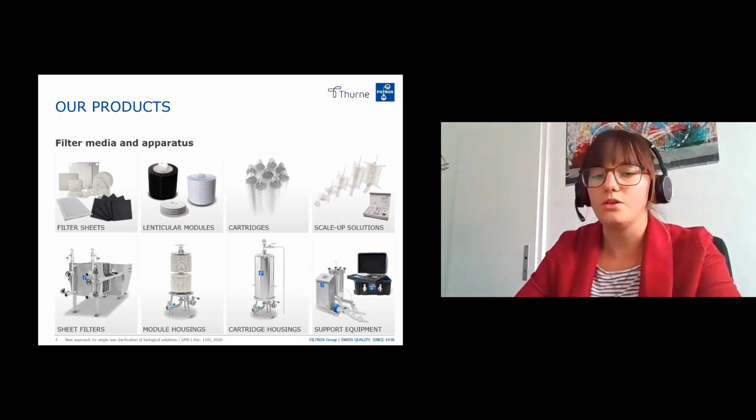We also have all-around assistance. So we do some trainings and seminars, testing services, validation support, and application consulting.

First of all, what are the trends in biomanufacturing? Often the goal is to reduce one production step, and when you achieve this, sometimes it results in cost reduction. Due to the biological process, we need a robust and flexible technology, fast and reliable, easily scalable and duplicatable process, and last but not least, particles or impurities must be removed.

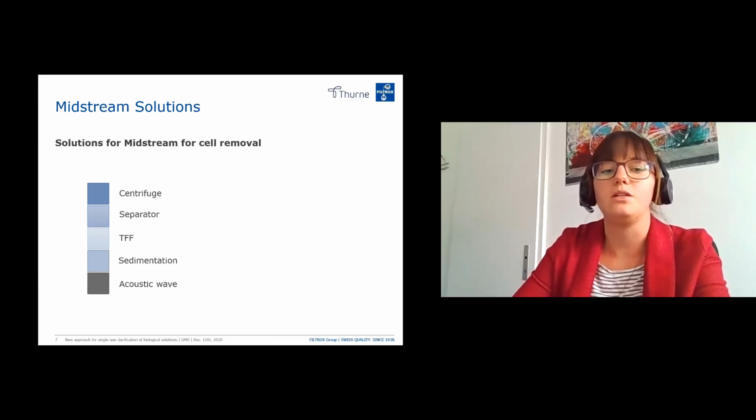Solutions for the midstream process. As you may know, you can apply a centrifuge step, a separator step, tangential flow filtration, sedimentation, or acoustic wave. All of these five process steps are nice, but they have one main disadvantage: they don't have a zeta potential.

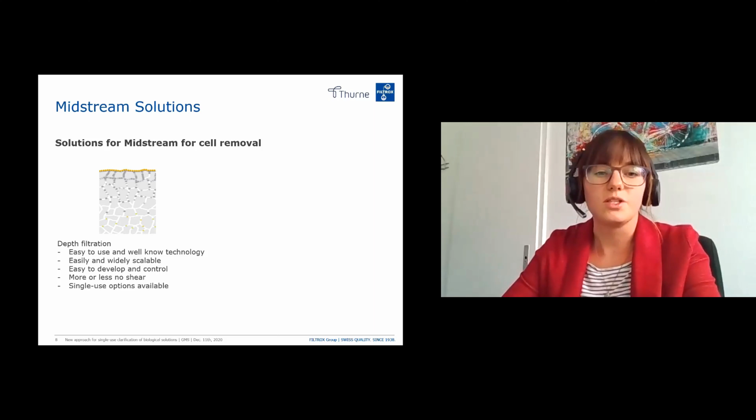So what do we offer as a solution for a midstream process? We offer depth filtration sheets. The advantages are they are easy to use. It is a well-known technology, easily and widely scalable, easy to develop and control, with more or less no shear stress. Single-use options are available, but the capacity is not high enough. Therefore, we recommend alluvial filtration, which has the same advantages as depth filtration, but with higher capacity.

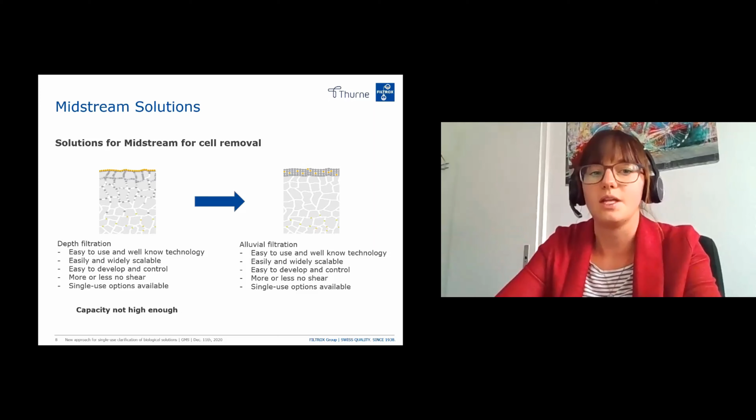Once again, I talk about the midstream process. We like to call it midstream because sometimes it's part of upstream, sometimes part of downstream. Here we have a centrifuge step and a depth filtration step, and with our single-use BioSD system, you can reduce one step, the centrifuge step, and do both in one.

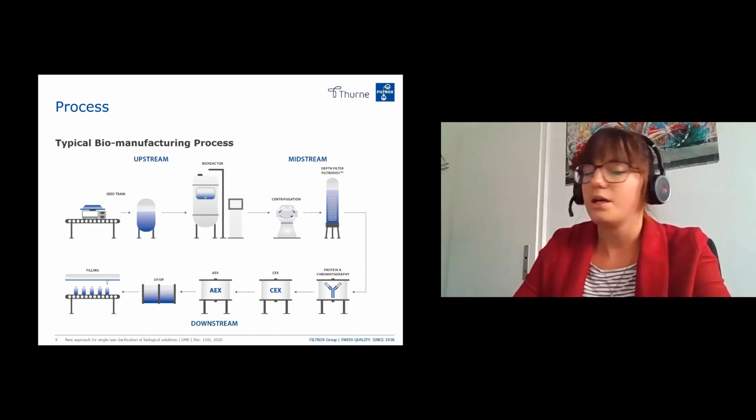Now I want to say something about the functional principle of filtration itself. First, surface filtration: particles are retained on the surface, and everything smaller than a certain retention rate goes through the filter. The depth filter sheet is much thicker, so particles are retained also at the surface, but also within the filter sheet by size exclusion. The yellow squares at the bottom indicate some particles which are retained by adsorption capacities or effects.

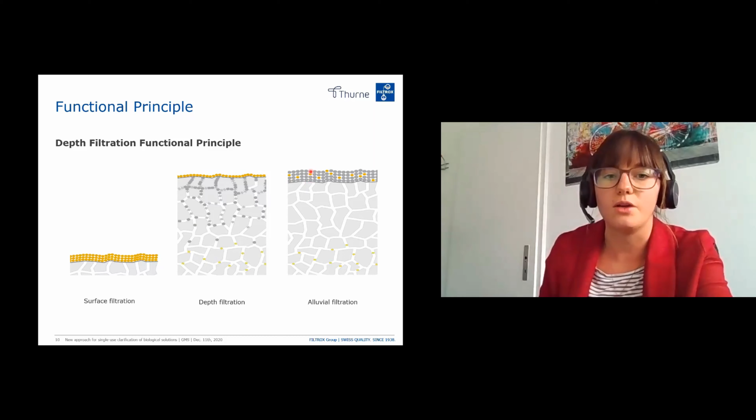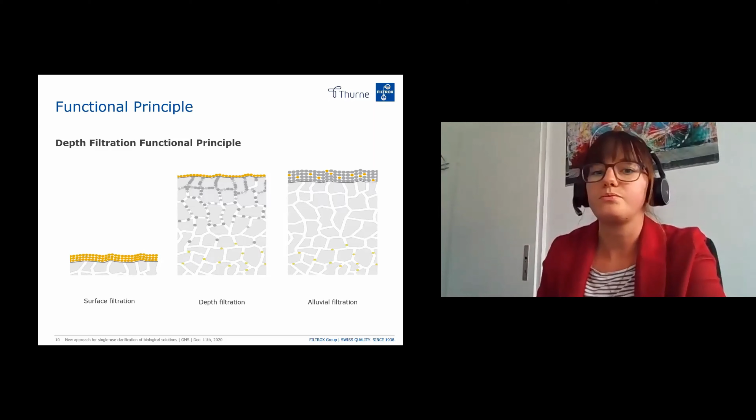And the alluvial filtration, here we add some filter aid to the unfiltered liquid, indicated by the gray dots. So particles, like the cells or cell fragments, will be retained within the filter cake, and the filter sheet or surface is constantly renewed. So the capacity is much higher. We also have some particles which will be retained within the filter sheet, of course.

What does alluvial filtration mean? As I said, you have a much higher capacity, also for a high particle load, especially when you work with high cell densities. It is an established technology, already used in plasma fractionation, and we have long-term experience in beer filtration. So far, it was not available as a single-use solution.

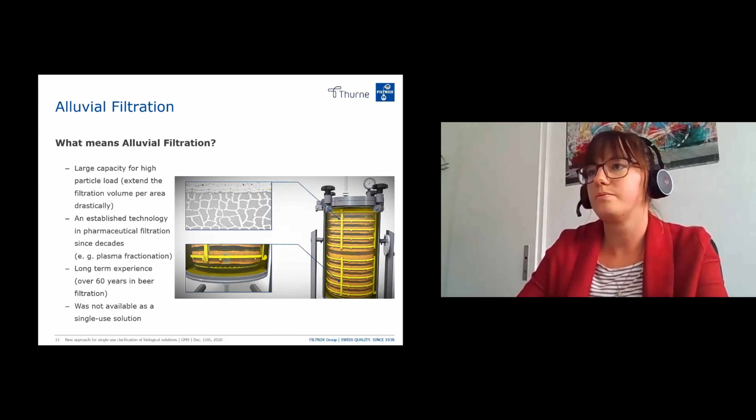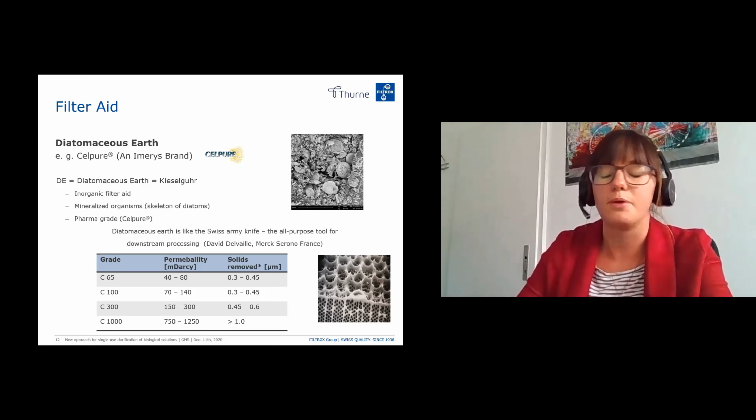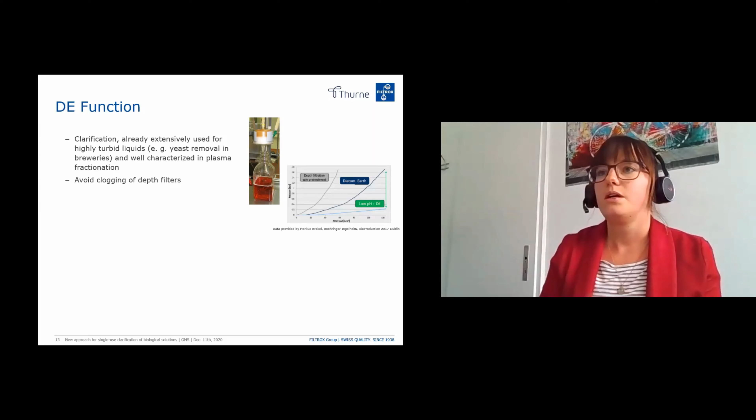The function of the DE also helps to clarify your liquid, not only the sheet itself. That's why it is very important to use the right DE, so you have to check at lab scale which DE grade or type will be best for your process. It avoids clogging of depth filter sheets, and it can remove other impurities like HCP, DNA, etc. It can do all of this at the same time.

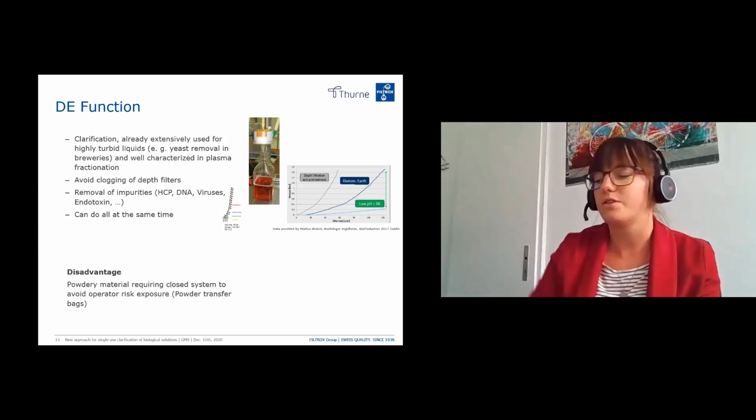There is one disadvantage, you may know. The powdery material has to get into the bioreactor, which is not very healthy, and that's why you need a powder transfer bag.

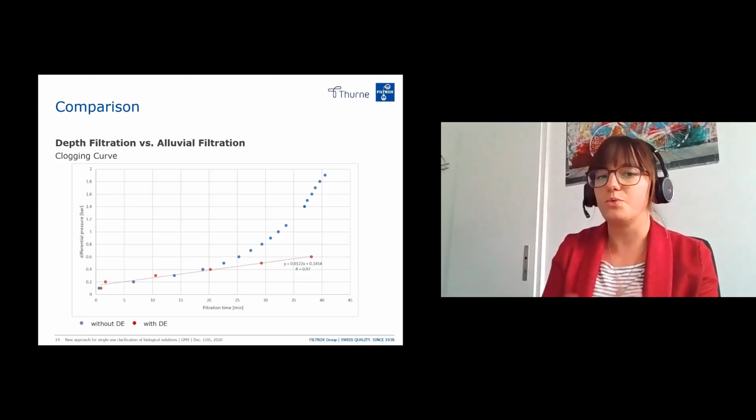In this graph, you can see very nicely the difference between a filtration with DE and one without DE. The blue dots indicate a filtration without DE, and as you can see, the pressure goes up very fast and exponentially. The same filtration with DE, the pressure goes up as well, of course, but linearly, and you can filter much more.

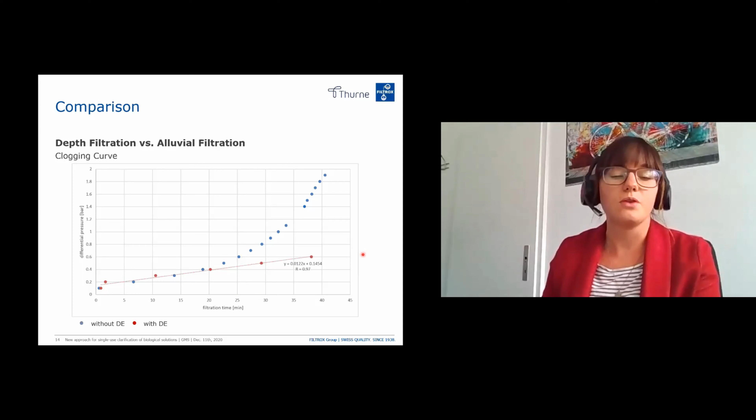This is a process comparison.

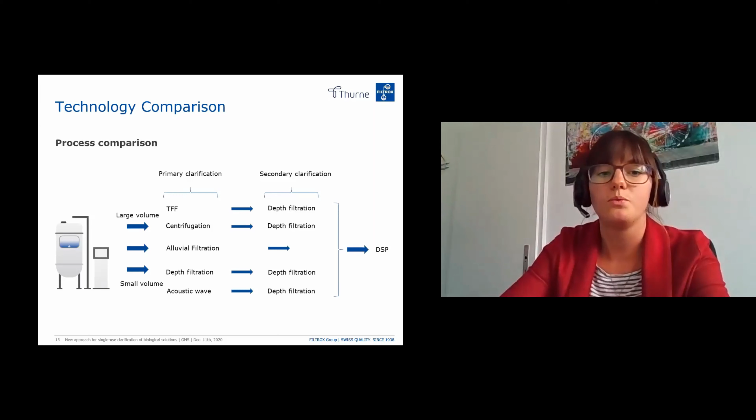If you have a large volume, you can add a tangential flow filtration as a primary clarification. After that, you can apply a depth filtration, or do a centrifugation step at the beginning and then a depth filtration before going further to other downstream process steps. For small volumes, you can add two depth filtration steps, or acoustic wave and depth filtration. With our BioSD system, you can do both primary and secondary clarification in one, with the alluvial filtration.

Now I come to our range, and I will start with a small scale, the 2-inch capsule. It is mainly used for proof of technology and for the evaluation of the DE grade and also of the filter sheet. I'll show you a capsule in real life. This is how it looks. You have a vent here, so it's very important that the air completely goes out of the capsule before you start the filtration.

After the 2-inch capsule, we have the next bigger one, which is the 5-inch capsule. I have it here as well. It looks similar, a little bit bigger, and it also has the air vent. I can show you them later when the presentation is finished, on the bigger screen. The 5-inch capsule is mainly used for evaluation of the 2-inch results and also for small pilot scale.

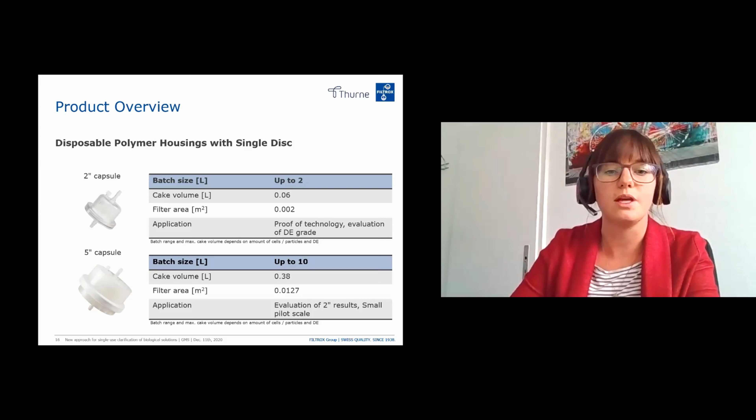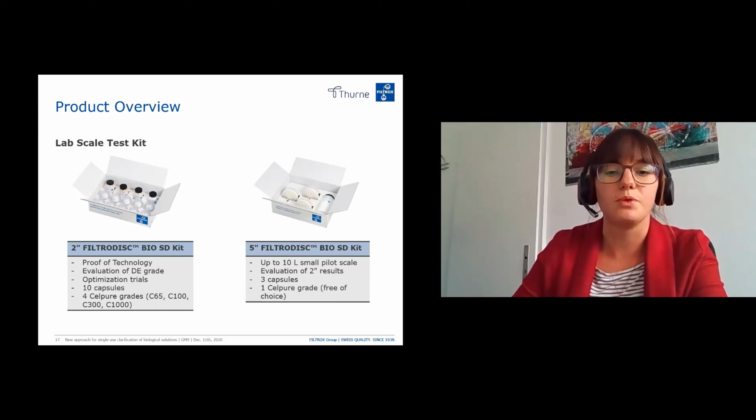Both the 2-inch and the 5-inch are available as a test kit. As I said, for proof of technology, the 2-inch is for evaluation of DE grade and amount, and optimization of trials, and it consists of 10 capsules with all 4 DE grades. The 5-inch test kit consists of 3 capsules and 1 Celpure grade, which is free of choice.

This is the setup in the laboratory scale that we recommend. You have the unfiltered liquid with the filter aid, and of course you have to mix it. Then a pump - we recommend a peristaltic pump - a pressure gauge, and a capsule with the vent. Then you have to collect the filtrate on a scale or with a measuring cylinder.

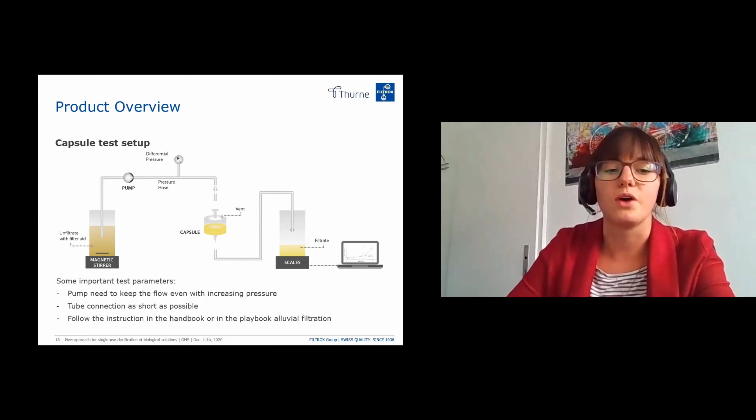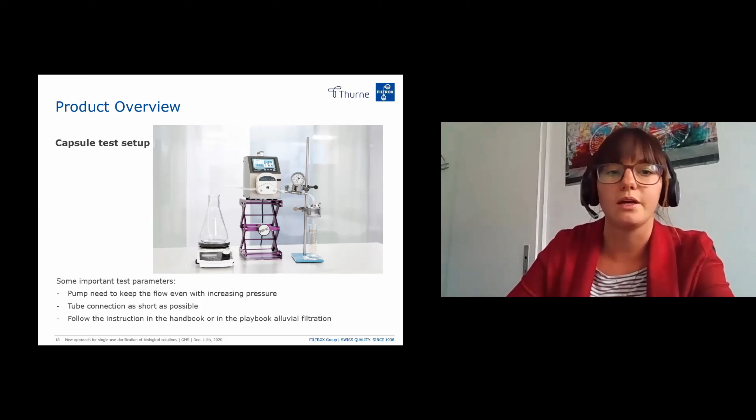Here it is very important that the pump keeps the flux even with increasing pressure. The pressure can go up to 2.5 bar, and the pump should go to 2.5 bar. Furthermore, the tube connection should be as short as possible, and I will show you that with this picture. This is how an ideal setup could look like.

The goal of a lab trial is always the same: the evaluation of the right DE grade in order to reduce the turbidity. Here you can play a little bit with the DE grade and also the filter sheet, and the optimization of the DE dosage so that you get a high efficiency. So the goal is to reach this green line - the optimization of pressure and time.

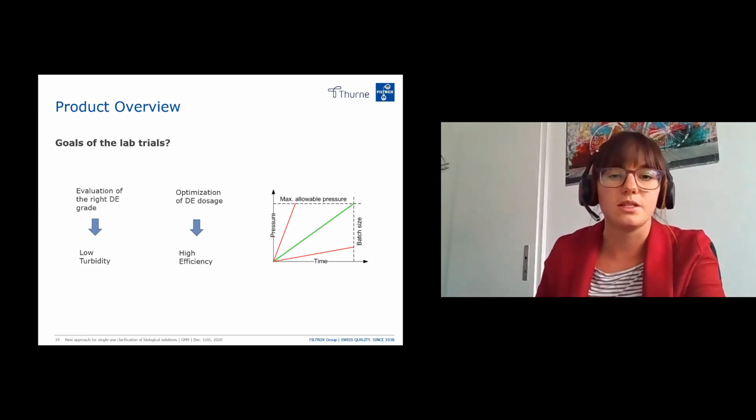Next to the 5-inch capsule, the next one will be the 10-inch capsule. This is the last capsule we have, which is not a standalone product. It just needs this filter holder. It is also used for small pilot scale.

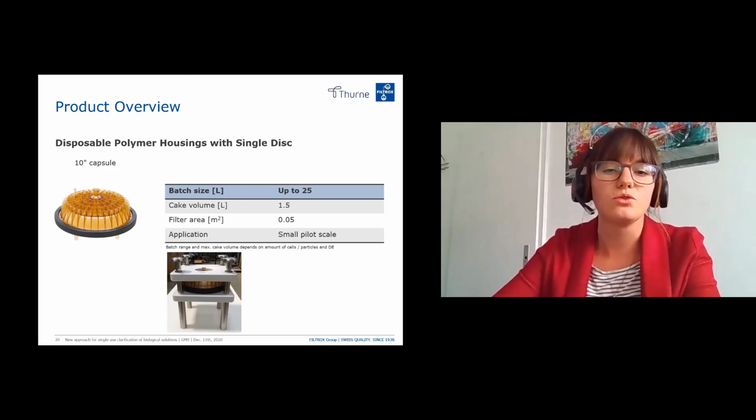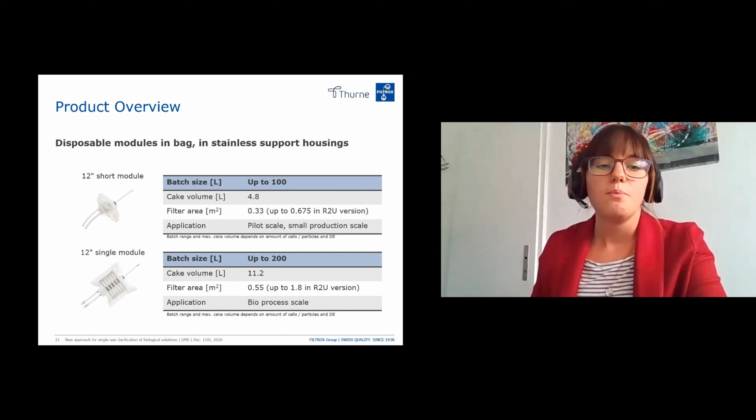Now I want to move forward with the bags. They need a stainless support housing - for example, the 12-inch short module, also for pilot scale and small production scale, and the 12-inch single module. Both of these are 12-inch, but this one has much less amount of lenses than this one, and both are available as a ready-to-use version.

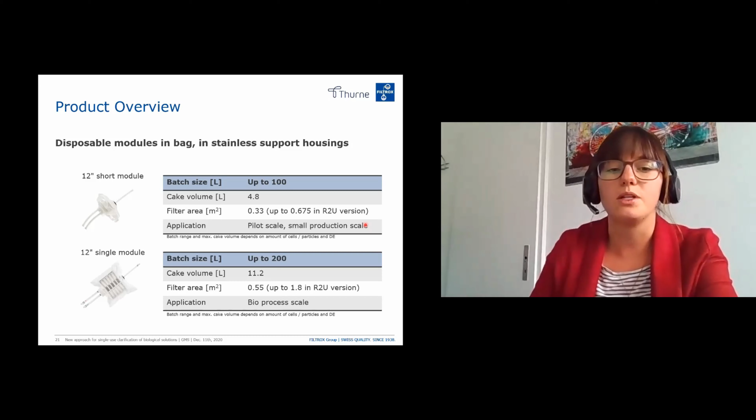Sorry, that means that the lenses are increased, so you have a higher number of lenses in a ready-to-use module, because the ready-to-use modules are mainly used for sheet filtration and not alluvial filtration. So for example, when you have a sterile filtration step with depth filter sheets in your pharmaceutical production process, you don't want to get in touch with your product.

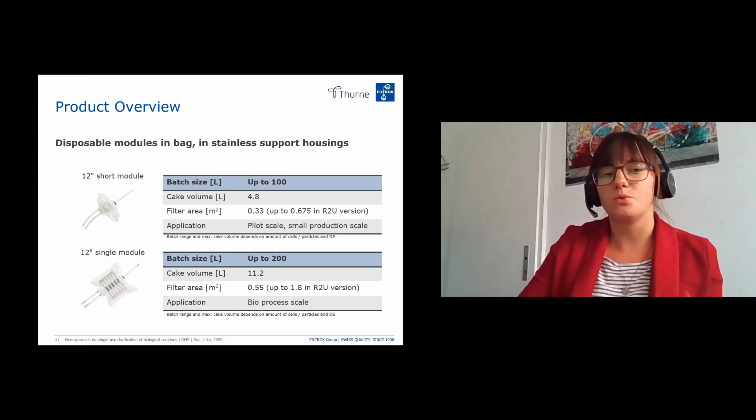I have this module here as well. This is how it looks like. I can show it later as well if you wish.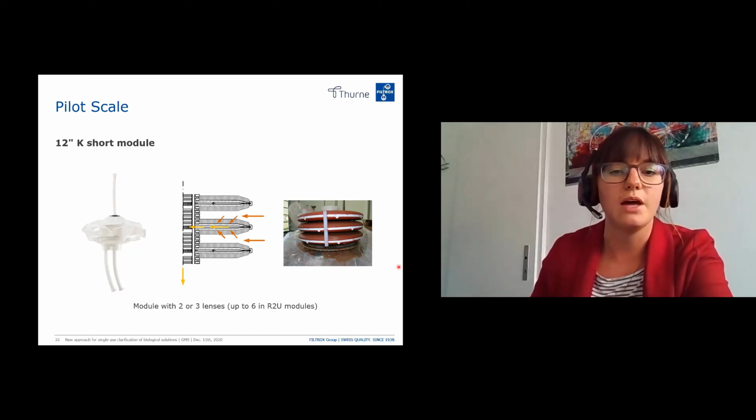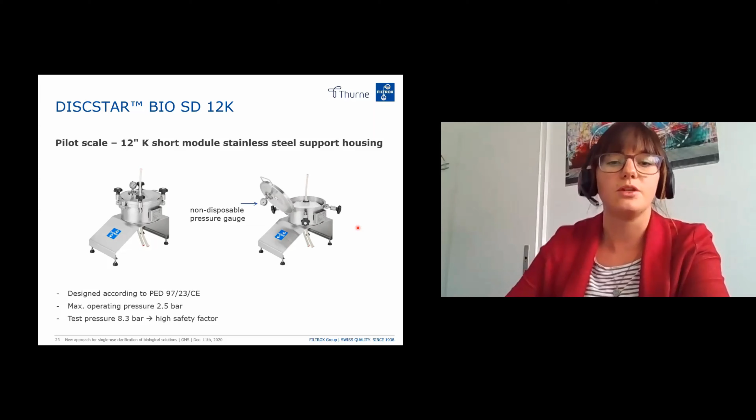And this is the support housing you need for this small volume module. As you can see, it is a very small housing, so you can have it on your table, on your laboratory's table.

This housing is for the 12-inch normal single module. All housings look the same, just a little bit different - some are a little bit longer than others. But all of them you can turn 90 degrees in order to remove the modules easily, especially when they are filled with filter cake - they are quite heavy.

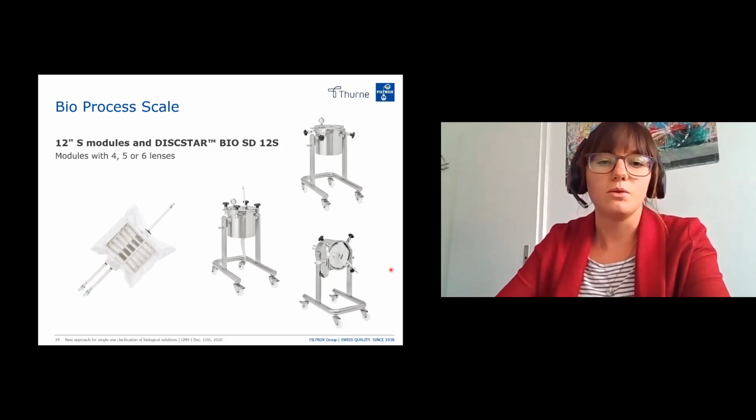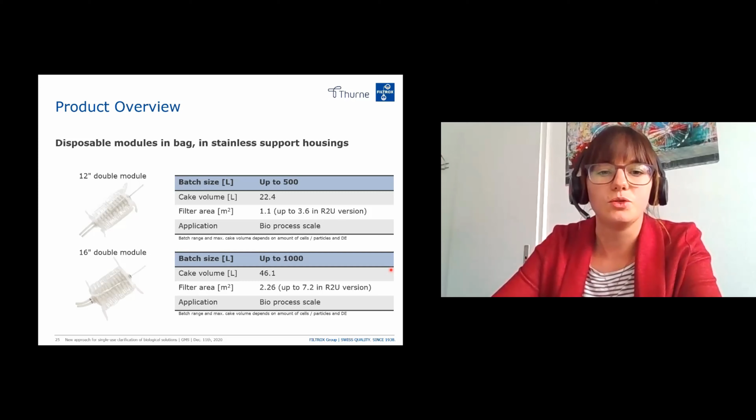So the 12-inch double module and 16-inch double module are the last ones in this series. The biggest one is the 16-inch double module, for the production process. And this is how it looks like in real life. As you can see on both pictures, the filter cake is built up on each lens in the same way and looks really good.

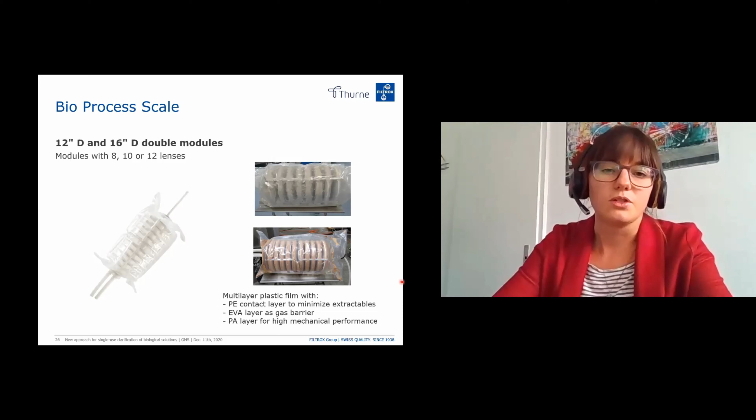It still has some space in it, so maybe in this example we could be able to filter a little bit more because the capacity is not reached yet.

And this is the housing. As I said, you can turn it 90 degrees to remove the module. And here we also have a trolley available, so that it is easy to discharge.

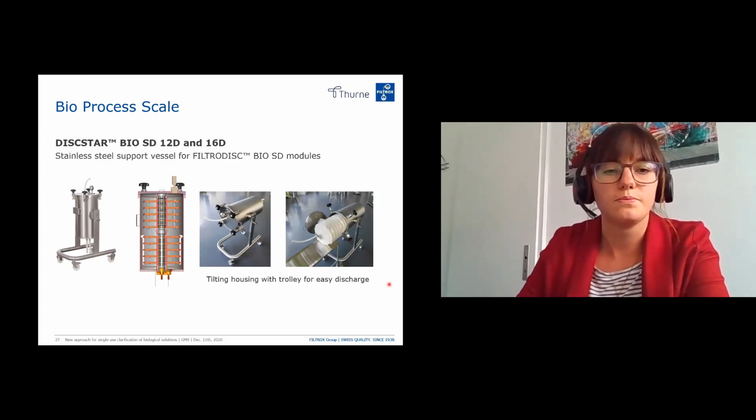We also do some skids. As you can see on this picture, here's the module or the housing in the module. We have here a Levitronix pump, single use, and a control unit. And here is a 5-inch capsule in order to reduce the dead volume.

So as soon as you finish your filtration, the bag still has a little bit of liquid in it. Then you can just go out of the inlet and filter the liquid through a 5-inch capsule, and then you can reduce the dead volume.

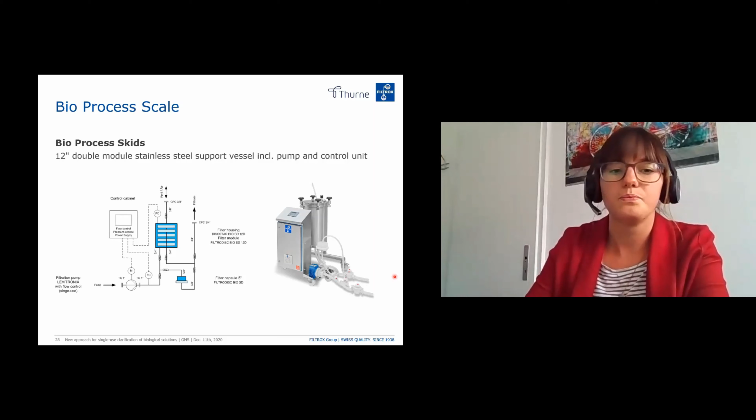We also can make some skids with many housings in one, with one control unit.

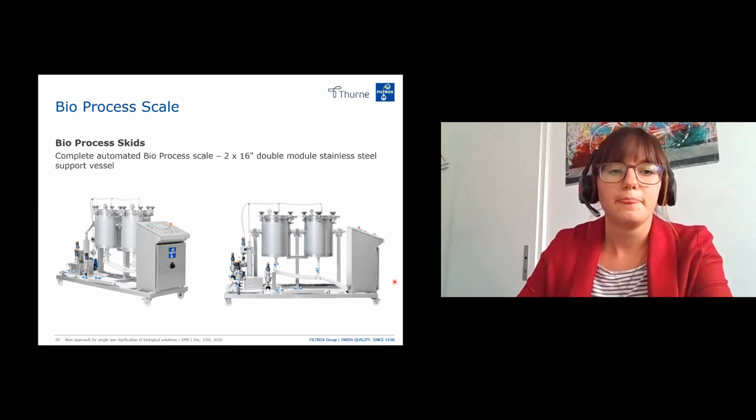And as soon as you have performed some trials in your lab, you have to calculate a scale up for your production, batch production. And this is really easy, just one calculation - it is a linear scale up.

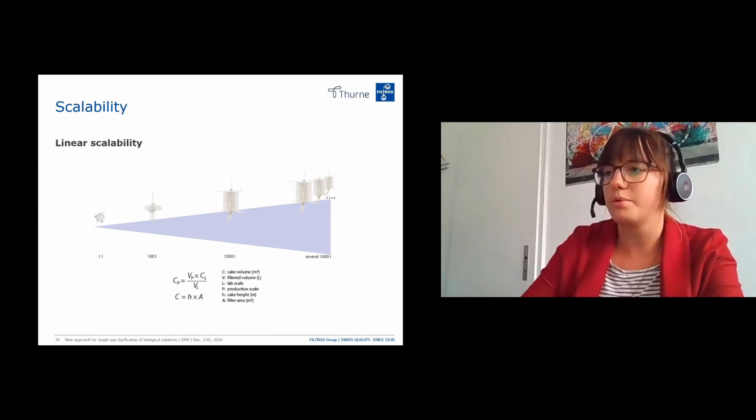I already told you something about the powder transfer bags. So there are 3 ways to get the DE powder into your process. First is feeding the filter aid into your bioreactor.

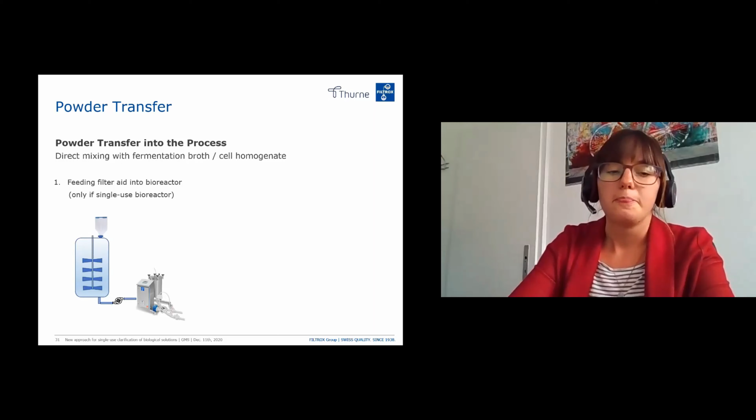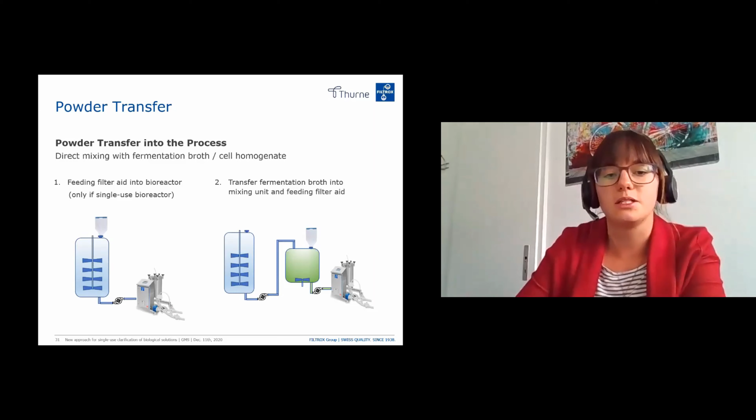Second option is to add the DE to a mixing tank. So if you have your bioreactor, then a mixing tank, then the filter, it is also possible like this. The third option would be that you get the DE as a slurry in your process - you add the DE with the buffer, for example, and then add it directly into the pipeline before it goes into the filter.

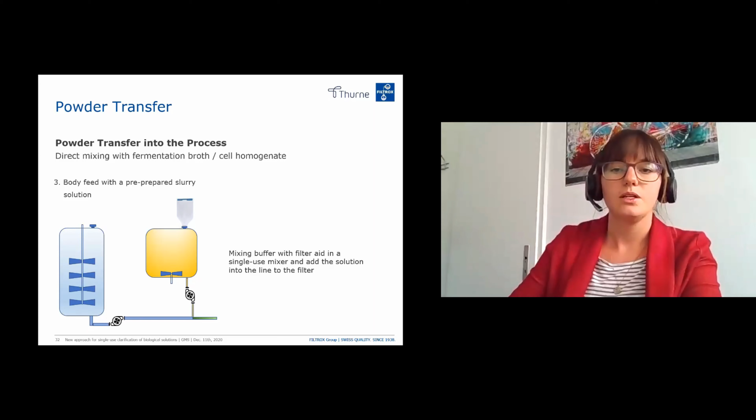A few words about validation. For support filter sheets, we recommend PURAFIX sheets. These are sheets with low ion and low pyrogen content, and some of them also contain the DE, the Celpure. Therefore, the pharma grade diatomaceous earth Celpure is already part of the sheets and does not require additional validation support.

Bag material consists of double layer PE. The tube consists of APSH, and other plastic parts, like the core body of the module or the drainage body, are USP class 6 material, and the powder transfer bags are made of LDPE.

We have all validation material available, so just contact us.

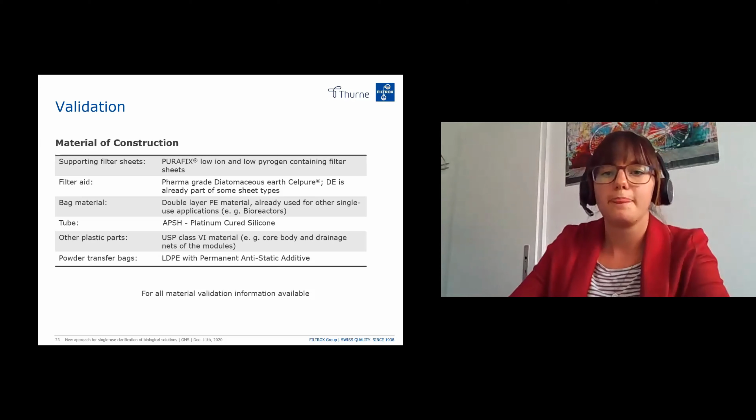Now I want to move on to some case studies - 5 different case studies - and I will start with mammalian cell removal for, like, monoclonal antibody production.

So for the background, you have your mammalian cells like CHO cells, and they produce a monoclonal antibody, and you have a primary and secondary clarification step. As you can see here, after the fermentation there's a centrifugation, after that a depth filtration, chromatography, virus inactivation, and again a depth filtration step.

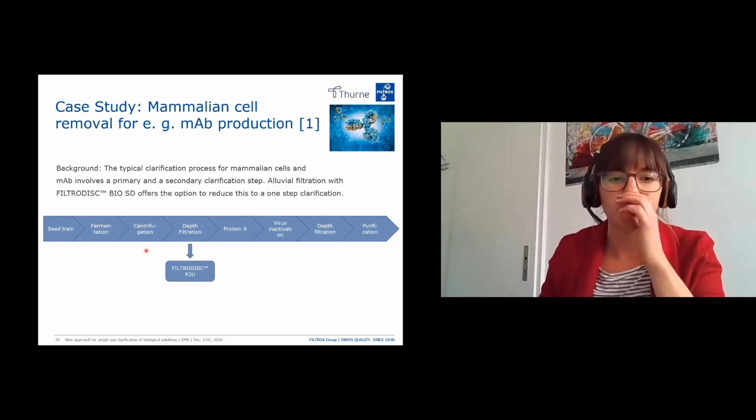Same at the second depth filtration step. Here we can provide a module, for example, with a PURAFIX HZP sheet. The sheet has a zeta potential, so negatively charged products or molecules like DNA can be reduced by these sheets.

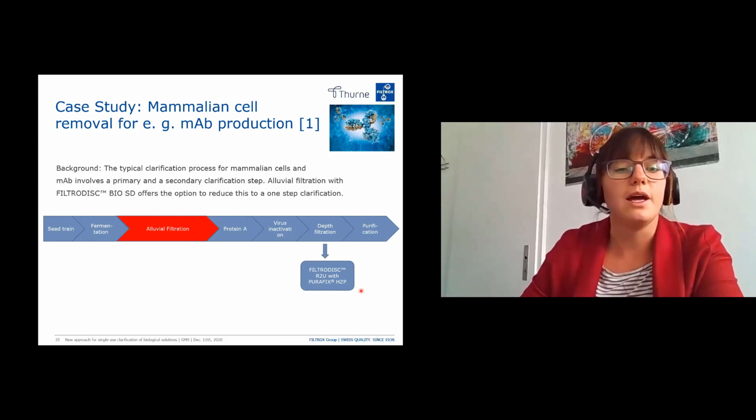But we want to remove one clarification step. So why not adding an alluvial filtration with our BioSD system?

Here we have an example of it. So the cells producing the antibody have approximately 90% viability. We want to harvest it first in a laboratory scale with a 2-inch and then with a 5-inch capsule with a Purafix sheet. The CH09P is quite a coarse sheet, so it is mainly used to hold the filter cake. It has a filtration effect, but the main effect is that the filter cake does not go through.

Flux is approximately 400 to 500 liters per square meter per hour. Here you have a comparison of the different DE amounts. The blue line is a trial with 10 grams per liter DE, the yellow one 16.5 grams per liter, and the green one 13.5 grams per liter.

As you can see, the green line doesn't go up as much as the other ones. It goes up, that's normal, but not as fast as the other two. That's why the same amount of 13.5 grams per liter was used with the 5-inch capsule.

Here you can see the comparison. The green line again is from the trial with the 2-inch capsule, and the blue one with the 5-inch capsule.

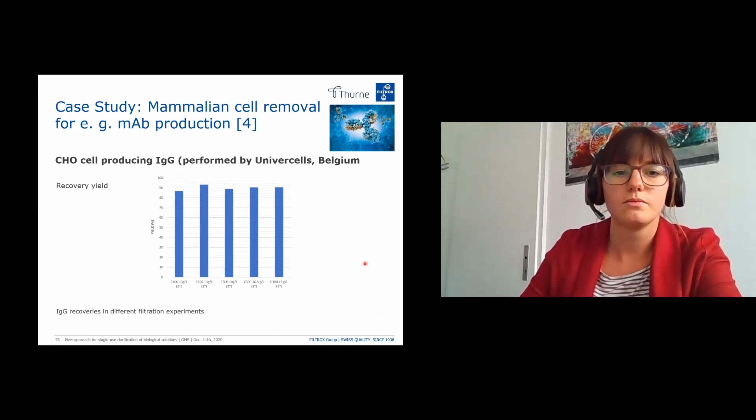Of course, the yield is very important. Sometimes you have a product which can bind to the DE. This is possible, but usually, especially in biomanufacturing processes, it's not common. But it has to be monitored.

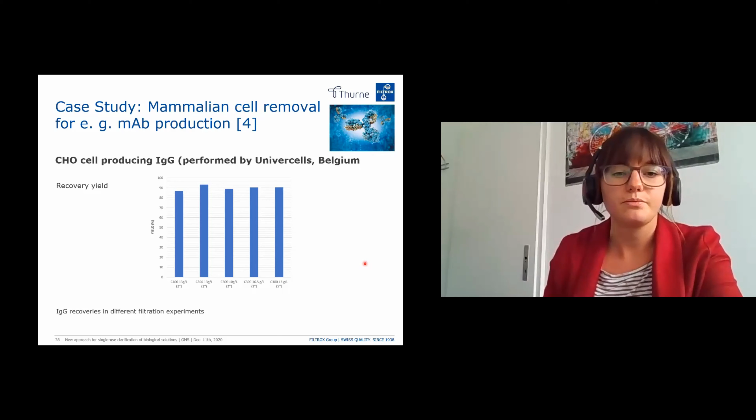To conclude this case study, we had a productive approach with a high flux of 450 liters per square meter per hour, which is quite high. Usually for alluvial filtration you need a minimum flux of 300 to 350 LMH. The throughput was really high, 400 liters per square meter. This is very good.

We had a consistent clarification performance, as I already mentioned. The scale up is very easy.

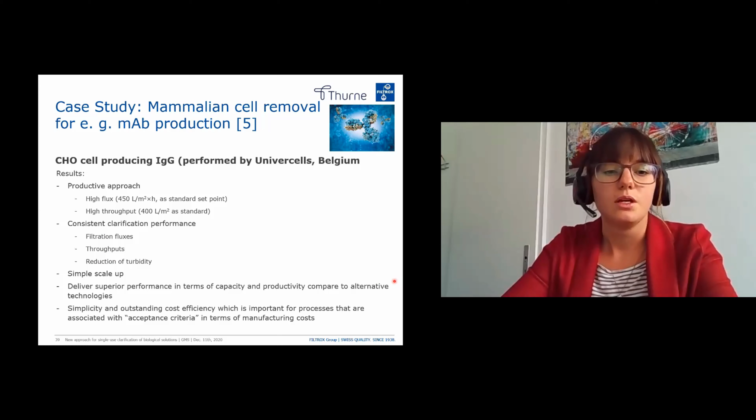The next case study is about plasmid DNA production. Plasmid DNA is used in the production of viral vectors, as you may know. Here again we have the process with the E. coli fermentation, after that centrifugation, lysis steps, clarification, endotoxin removal, and purification.

Now we can look further into the clarification process. We can do a flocculation and then a depth filtration, or we can do a centrifugation and then a depth filtration. But as you may know, I will recommend alluvial filtration.

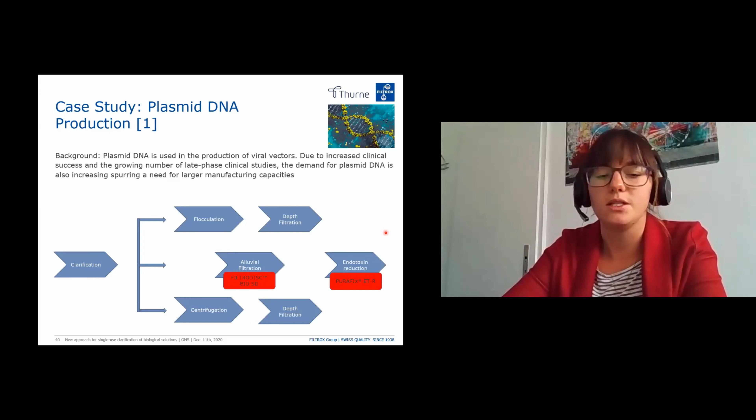After that we have the endotoxin reduction, and also for this we have special sheets. For the alluvial filtration we take again the filter disc BioSD, and for the endotoxin removal we have these Purafix ET-R filter sheets.

The advantages: it is again a reduction of process steps, so we don't need the centrifugation step. Therefore we have a cost reduction. The process time is reduced, and there is a cost-effective reduction of impurities, especially endotoxins, with this special filter sheet.

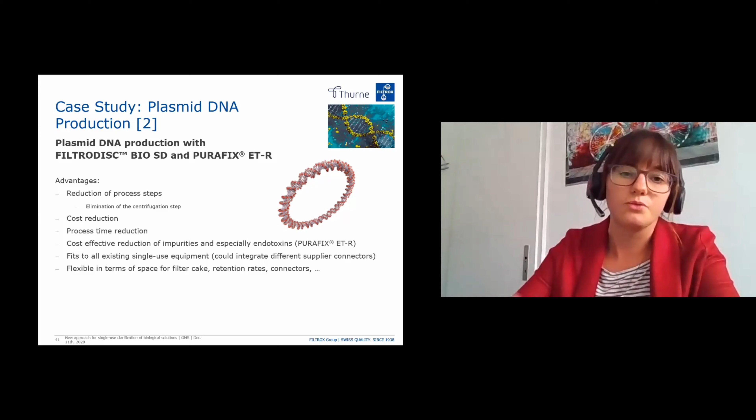It fits all existing single-use equipment, so it's not a problem to add this Purafix ET-R to any of our systems. It is flexible in terms of space for the filter cake, retention rates, and connectors, and stuff like that.

Next case study is about viral vector clarification. As you may know, adeno-associated viruses and lentiviruses are currently being developed for numerous indications in the field of gene therapy.

Here again, after the vector amplification, we have a vector expansion, purification, polishing, and fill and finish. For this step we can use a bioreactor, approximately 50 to 1,000 liters. We have to use CHO cells and do a vector transduction.

We have then the lysis and clarification step, which is mainly done with a centrifuge. After that, again a depth filtration, which can be made with a ready-to-use system. But again, also here, the alluvial filtration works very well with our BioSD system.

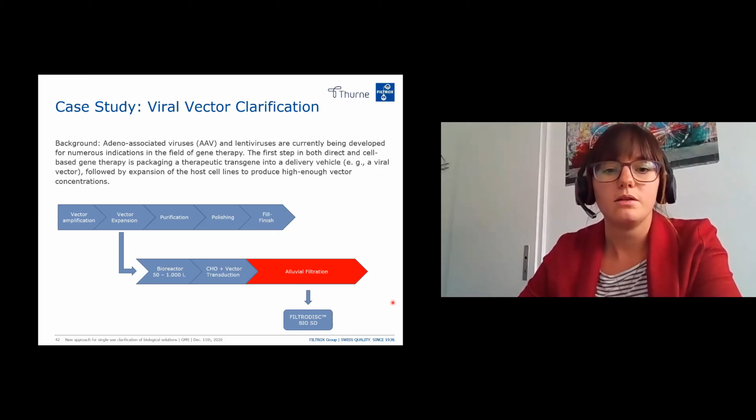But before doing this, you have to check if this influences your target protein - this is very important. And afterwards, the pH needs to be adjusted again.